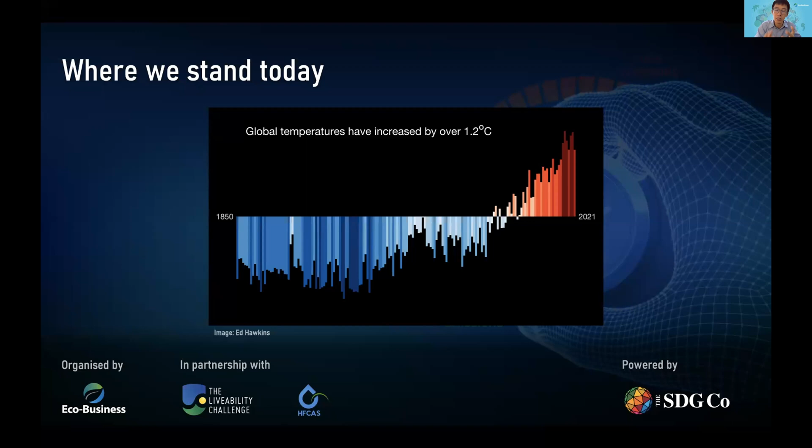I guess the tougher question now is how do we then take rapid steps to decarbonize, especially for a region like Southeast Asia? If you look at our energy consumption in the region, a good 75% is still fossil fuels. Renewables is the fastest growing energy segment, but the phase out of coal, gas, and oil will still take a few decades at least. So in the meantime, total energy demand is also rising rapidly as these countries develop in the region. It's estimated to go 60% higher in 2040.

Of course, renewables are taking center stage now in the fight against climate change, but there are also other technologies on the horizon which might be able to give the climate battle just that little boost. So that's why we're here with 2 of these technologies. One is, like I said, CCUS. In very simple terms, it's a way to capture carbon emissions and either store it underground or convert it into another useful material. The other is hydrogen fuel.

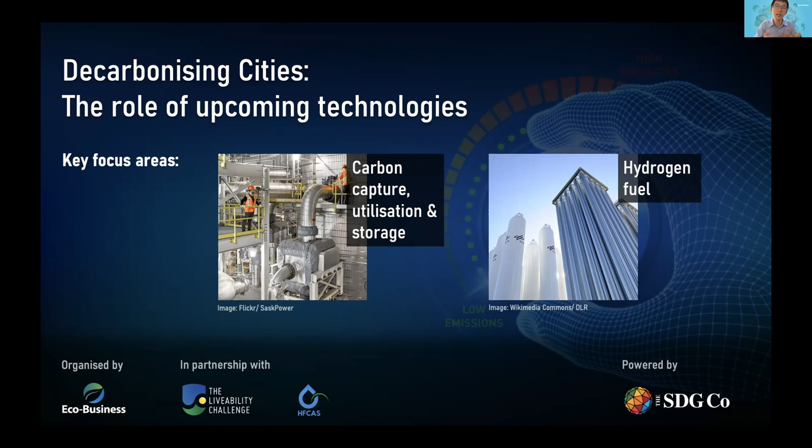It's not new per se, as it's been widely produced from fossil fuels for industrial users. Cleaner forms of hydrogen production are still nascent, but they're being developed today. And the world, of course, is tinkering with ways to replace fossil fuels with clean hydrogen. Of course, there are also challenges, and some of them concern their very role in a rapidly decarbonizing world because of their sometimes close links to the fossil fuel industry.

So now I'm delighted to introduce our speakers here with us today. We'll get the ball rolling with their presentations. We have Mark Allen, who is the founder of climate tech platform Unravel Carbon, which uses software and analytics to track and reduce businesses' carbon emissions. Mark is a chemical engineer by training and has 2 decades of experience in the energy sector, so he's familiar with both CCUS and hydrogen projects.

We also have with us today Noel Chin. He's the president of the Hydrogen and Fuel Cell Association of Singapore. Noel's worked on projects with hydrogen fuel cells in the past, and he has been very active in connecting the research and industry community together through the association he founded. Thank you for being with us here, Mark and Noel. I'd like to pass on the time now to Mark, who will present an overview of CCUS and low carbon hydrogen in the region. So anytime, Mark.

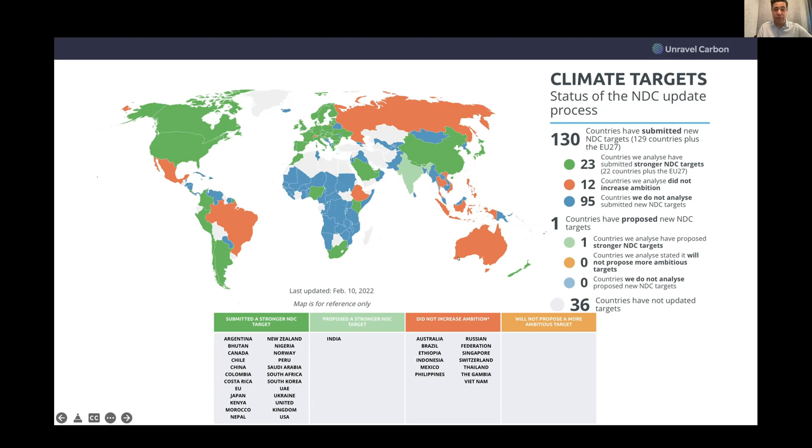You can see those in green, they've all committed to set a stronger target. The UN has stated that coming into Cairo COP27, all countries are to come with increased ambition. So all countries are going to be required to decarbonise at a faster rate going forward. Obviously, that's impacted everything we're doing here in Singapore.

You may have seen some of the speeches around the Singapore budget speech recently and what the country's doing, particularly with respect to the carbon tax, increasing it from $5 per tonne now up to a potential price of $50 to $80 per tonne in 2030.

Some of the things they're doing around that are to flag or potentially implement a future revision to targets, and achieve net zero by or around 2050, which is different from the 'as soon as practicable in the second half of the century.'

That hasn't yet been formalized in the low emissions development strategy nor the nationally determined contribution, but in the lead up to Cairo, I would expect a little bit of motion in this area as well.

Not to mention companies are going to need to understand their exposure, look at what decarbonisation means to them, and disclose to SGX for listcos coming up this year.

Add on top of that, net zero commitments that have been made by a number of countries, particularly in the region. So 90% of global GDP is already covered by a net zero target of some description.

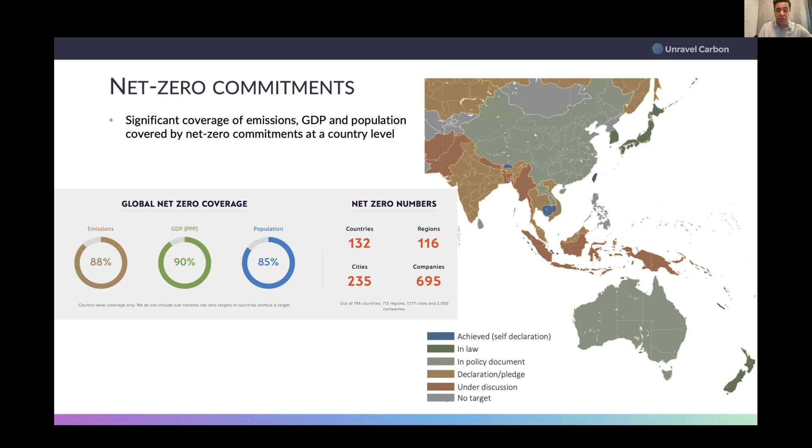But there's a lot of talk in this area and a lot of discussion around achieving net zero. Then really important: how do we do that?

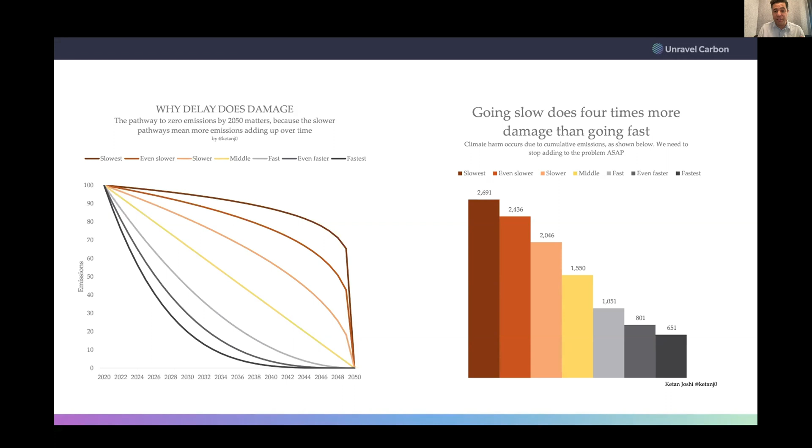This has an impact on cumulative emissions. Climate change is actually a cumulative emissions problem—it's not about the absolute emissions we put up each year, but how much emissions we put in over time. Taking the slow way, doing it all in the last minute, adds significantly more cumulative emissions than decarbonising today. So it's really an impetus to start decarbonising as fast as possible.

We're looking now at three key pillars in terms of decarbonisation. Firstly, the electricity system—number one, electrifying everything that can be cost effectively electrified. So we're talking about electrification of transportation, something Singapore is very big on, electrifying the built environment, getting rid of where we're currently using gas for residential or commercial uses, and of course electrifying low-grade heat, replacing gas or LPG with electrons.

Then we're also maximizing our efficiency—installing high efficiency motors, industrial chillers, maximizing efficiency of distribution, etc., and making sure that all of the electrons we generate get to where they need to be and are used in the most efficient manner. These are not sequential—everything gets brought up together.

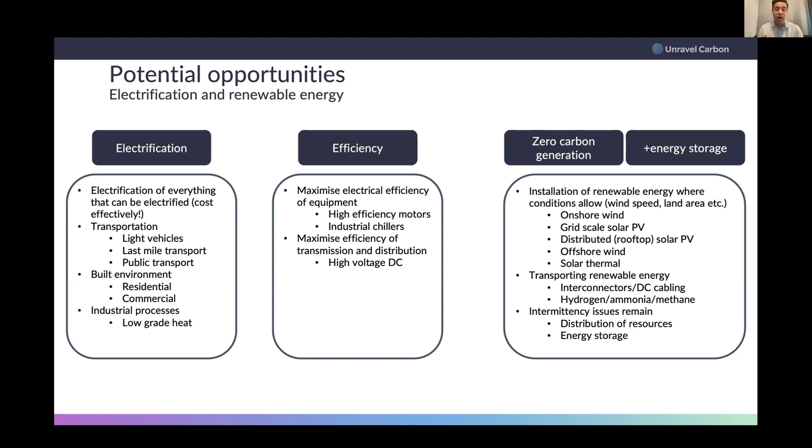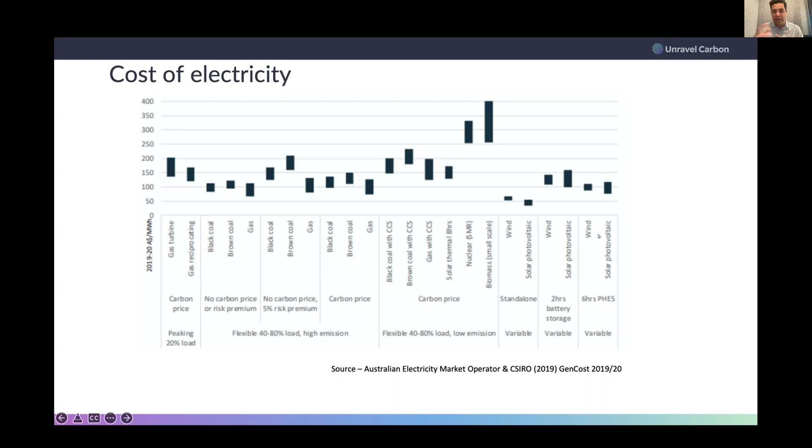At the same time, we're looking at how do we generate zero carbon energy. And because renewables are inherently intermittent, how do we solve the energy storage question, which is where there's a big role for hydrogen or ammonia or methane or one of the hydrogen carriers. On a cost basis, yes, wind and solar are the cheapest way to generate electricity on a levelized cost of energy basis today. When we start to include things like storage, it actually takes renewable energy onto par with some of the fossil fuel energies at the moment, even with a carbon price. So we need to solve this battery storage, this intermittency issue.

So when we start to look at that, then what are the ways in which the different technologies we have available to store energy? Hydrogen itself plays a big role in terms of something that can store a lot of energy and can discharge it over a long period. Synthetic methane also lives in there. Some of these physical methods - pumped hydro, cryogenic air, compressed air - they can all play that role as well. A lot of the focus is currently on lithium-ion batteries, but an issue is they discharge over a relatively short time, and the way you store a lot is just by having more and more batteries one after the other. So they're not as good for grid-level storage.

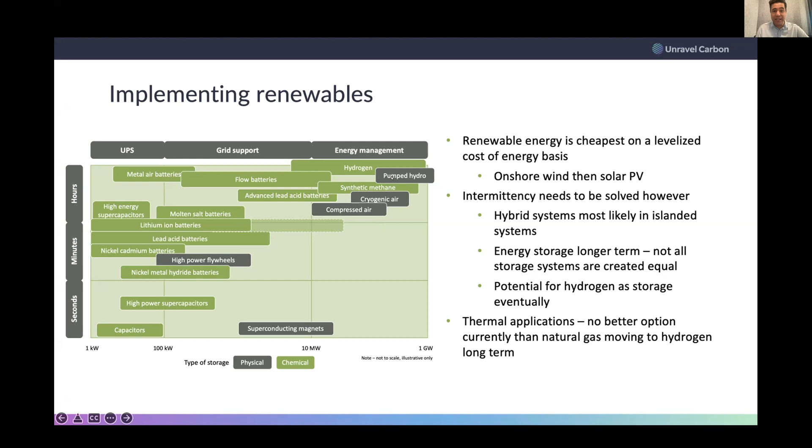And long-term storage - this is where we start to see, certainly in an energy management area, hydrogen playing a big role. So if we start to look at some of the potential opportunities around using hydrogen, what are the demand centers that we have for hydrogen? We've got a cool picture here of the Kawasaki ship, the Suiso Frontier, that just delivered its first load of liquid hydrogen to Japan from Australia.

So hydrogen itself forms an important part of the zero carbon future, but there are a number of technical challenges, particularly around storage and transport of hydrogen. And a lot of these issues are actually as a result of the physics of hydrogen - physical characteristics of the molecule that make it difficult to store and difficult to transport because it's very low density, it's very small, it tends to leak, and has to be stored at really high pressure or really low temperature.

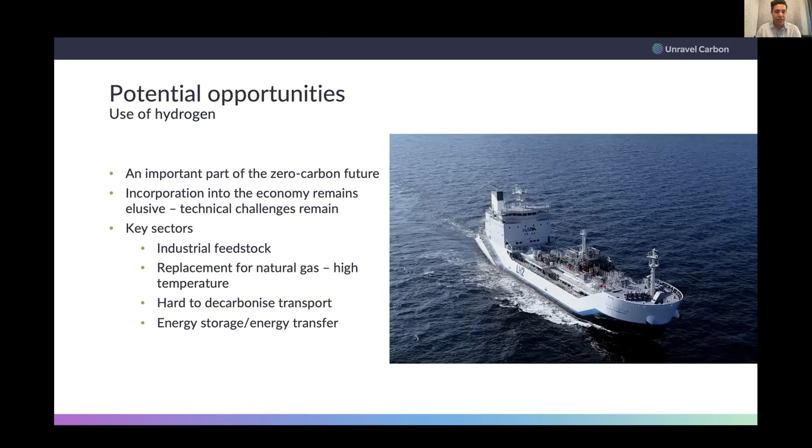Key sectors in which we're going to use it going forward and currently use it: industrial feedstock is a big place right now, and changing that to green hydrogen is almost a no-brainer. Replacement for natural gas for high temperature applications, using hydrogen to provide that heat that we might need in power generation or in boilers, etc. Hard to decarbonize transport - ships and planes and long-range off-road vehicles, etc. And of course, energy storage and energy transfer - taking renewable energy from where we have lots of renewable energy and sending that to places that don't necessarily have that same access to renewable energy.

Then looking at the different methods of hydrogen production, there's the current industry standard, the brown or grey, as it's called - when I was in the hydrogen industry it didn't have any colours, but now it does. So producing hydrogen from fossil fuels using a steam reforming plant, partial oxidation gasification - well-established process, very mature, generates quite a lot of CO2. Blue hydrogen is where we use a fossil fuel fired hydrogen plant, but we install carbon capture and storage on top of that - two operating in the world currently. And then finally, the holy grail, green hydrogen - producing hydrogen from electrolysis using green energy or clean energy.

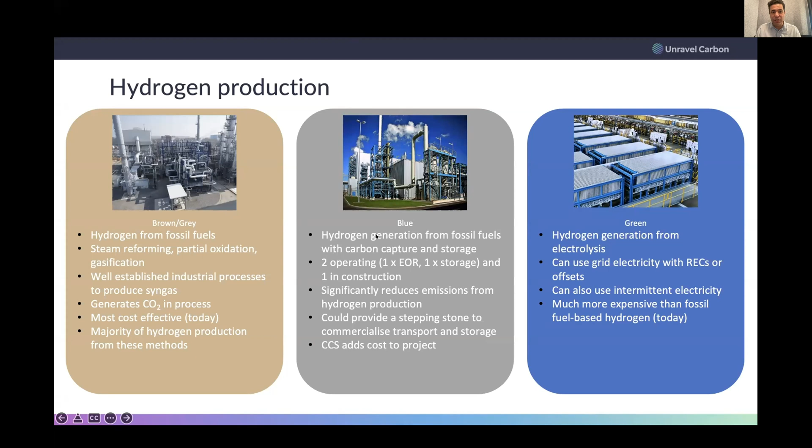And one of the advancements is electrolyzers can now actually handle some intermittency in the energy that they receive. To give you an idea of cost variation, we're talking about 80 cents a kilogram for brown or grey hydrogen, maybe $2 to $2.50 per kilogram for blue, and then $5 to $8 for green hydrogen.

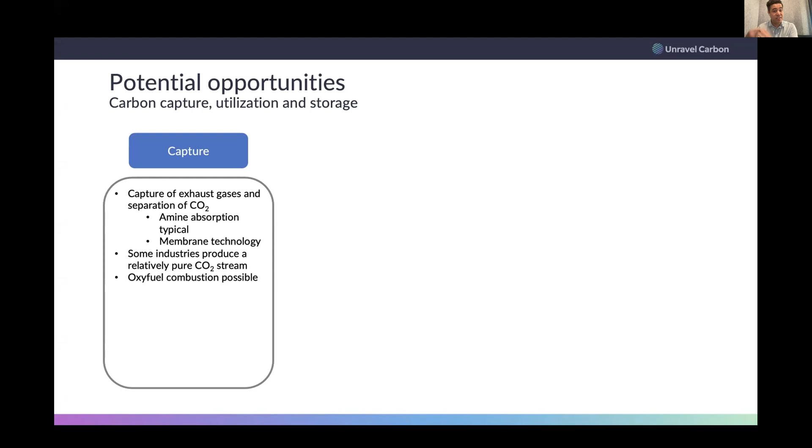We look at three key areas. So the capture part - taking a CO2 stream, or a stream that's got CO2 in it, running it through pieces of equipment like amine absorption or membranes, etc., and we can separate out the CO2 from that. Then we have the portion that is transport. So we capture CO2, we make pure CO2, we either liquefy it or compress it into what's called dense phase, then transport it to a storage location, and then we inject it underground - we actually inject it into the rock.

So understanding subsurface geology is key here, making sure that it can accept CO2. You're not going to break the rock apart when you inject the CO2 in there, making sure it doesn't move too far nor leak out. So that's the storage part.

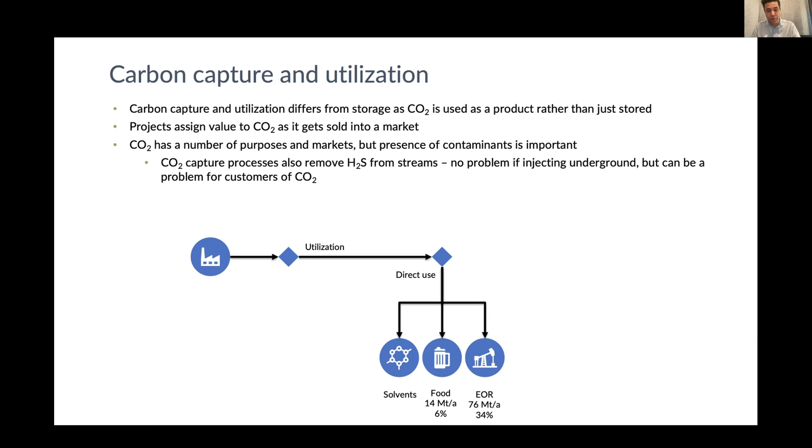somewhere around $70 to $150 a ton to justify that. If you can sell your CO2 for $70 to $150 a ton, then you've got a viable utilization project. So we've got some areas where we use direct use of CO2 in products, food, and oil recovery, solvents, and then some where we transform CO2 into something else — plastics, chemicals, fuels, etc.

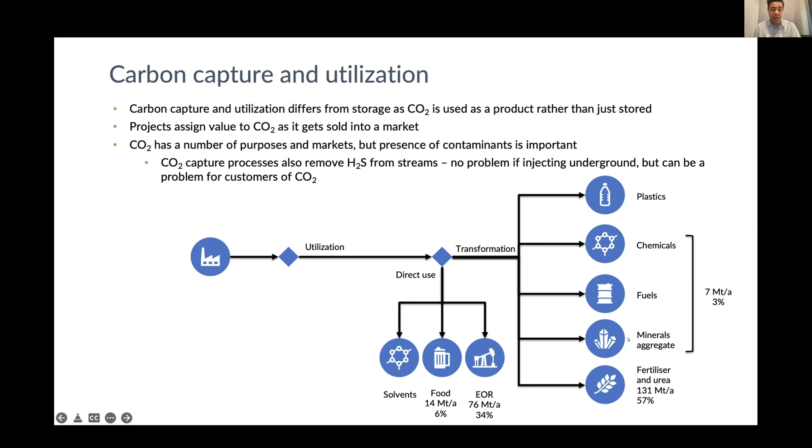So overall, the drivers are getting stronger, with much of the world's GDP now covered by net zero commitments, and hydrogen and CCUS certainly have a role to play there. Thank you very much, I'll pass back to Liang Lei.

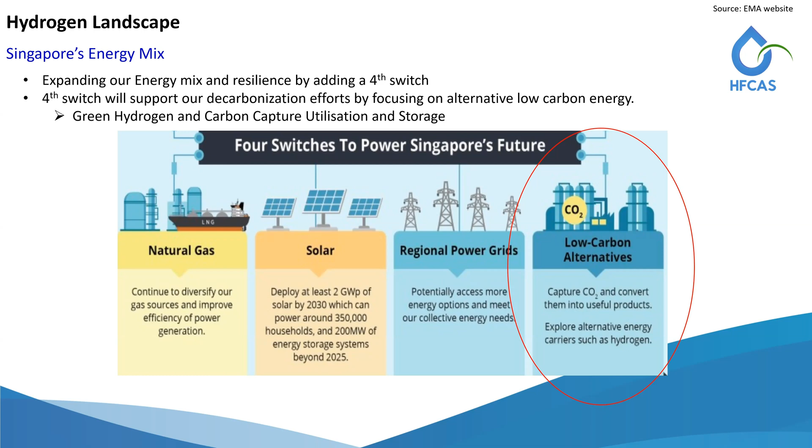Earlier this month, the Energy 2050 Committee announced a long-term strategy to decarbonize our energy sector by 2050, and hydrogen plays an important role in the medium to long term.

So what's green hydrogen and how is it produced? Traditionally, hydrogen was produced using the steam methane reforming process, where natural gas is used as fuel and CO2 is emitted. Whereas green hydrogen is produced through a process called electrolysis, where water is split into hydrogen and oxygen, powered by excess renewable energy. Unfortunately, Singapore, as a renewable-disadvantaged country, is unable to produce its own green hydrogen, except for the pilot trial at SPTI, which I will explain later on.

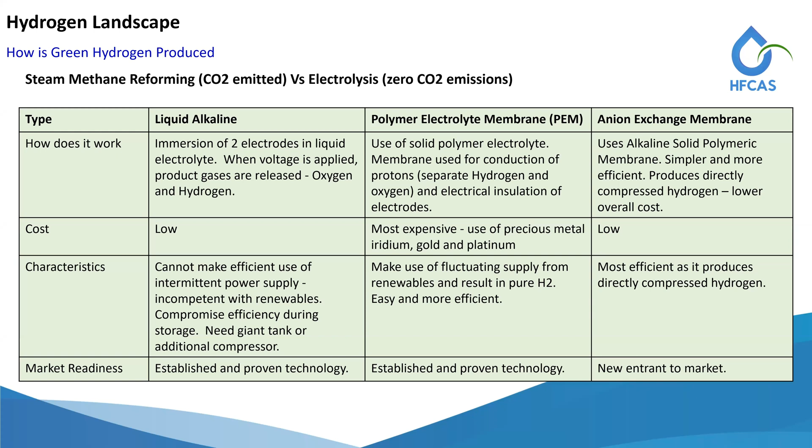There are three main types of electrolyzers, each with its own advantages and disadvantages. Of the three, the anion exchange membrane electrolyzer seems to be the most promising to date because it's able to lower production costs and is a lot easier to implement. We're pleased to share that our own local startup, SunGreen H2, is doing this and exploring overseas partnerships.

Here are the various energy carrier options that Singapore is exploring, such as green ammonia, liquid organic hydrogen carriers, and liquefied hydrogen. While each of them have their own merits, we have not closed our doors to any of them. It is thus important to carry out feasibility studies to explore each of these options.

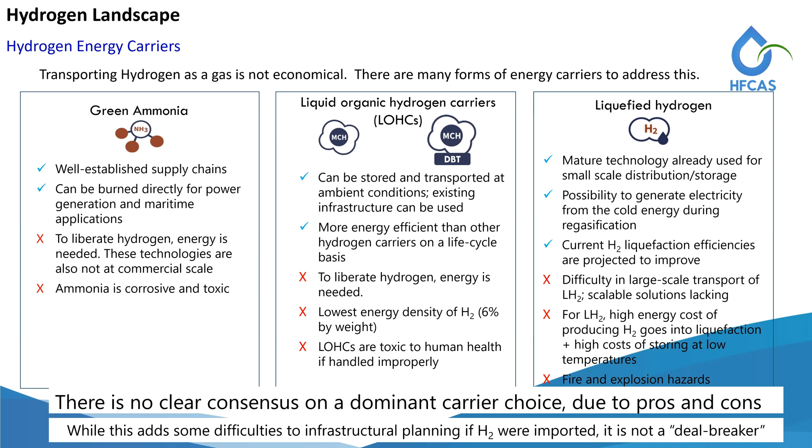This slide provides an overview of the hydrogen supply chain. Earlier, we looked at how green hydrogen is produced and the various forms of energy carrier. To be able to ship these carriers, vessels would need to be built to store and transport it, especially for liquefied hydrogen at minus 253 degrees Celsius. At the receiving end, ports will require specialized facilities to offload the carrier, store and process them before they can be distributed in the form of hydrogen to the different sectors.

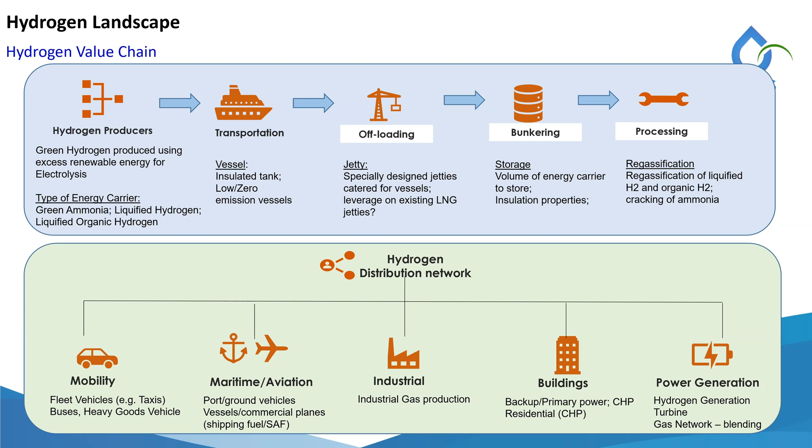What factors contribute to the eventual price of green hydrogen imports? As shared in the KBR report, one of the factors is the additional transformation and liberation costs, depending on the carrier. In the case of the Neoen project in Australia, this accounts for up to 60% of the landed cost of hydrogen. Other factors such as the cost of electrolyzers and the renewable energy from the source country are also important. But there is optimism that the cost of hydrogen would eventually fall due to more cost-effective transformation and liberation technologies, which is why there's a need for continual R&D, as well as the cost of electrolyzers and renewable energy falling in the long term.

Projections by the International Renewable Energy Agency, or IRENA, estimate that the cost of electrolyzers will be halved by 2040.

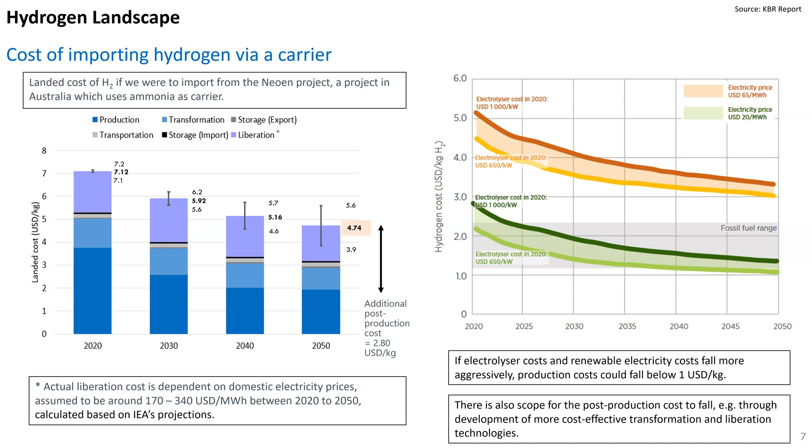Similarly, the report also highlighted other ways to secure low-carbon hydrogen. Other than shipping, you can consider piping hydrogen from nearby sources, or domestic production via SMR with CCS. We also look at electrolysis using electricity imports, biomass gasification, and methane pyrolysis.

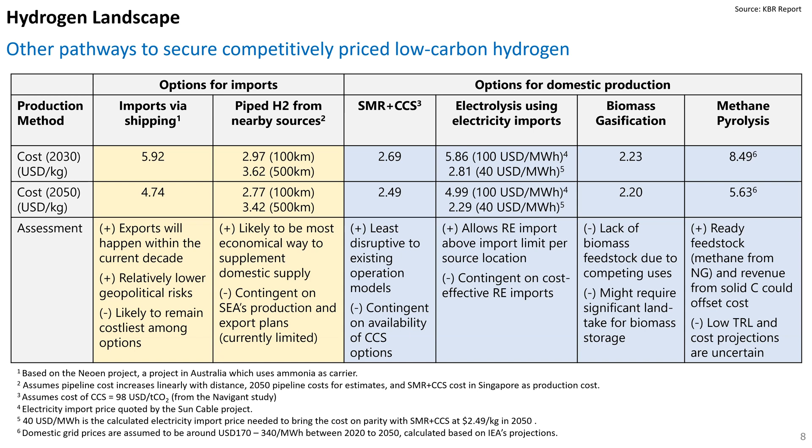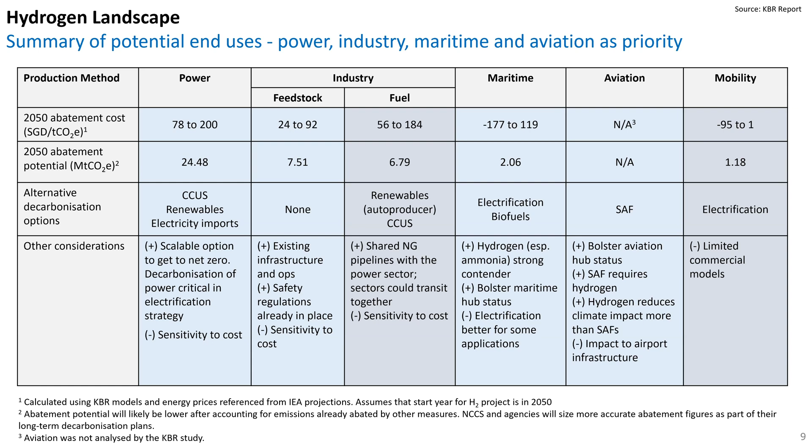Looking at how hydrogen can play an important role for the sectors identified that could transition to hydrogen, some can take place in the medium term, for example mobility, industrial, maritime, and aviation, while others will feature in the long-term plans, for example power plants. The next part of my presentation will dive into some of the applications for hydrogen in Singapore.

So what are the advantages of fuel cells? First of all, there are no moving parts, so no servicing is required. Secondly, it produces DC electricity, which can be used directly.

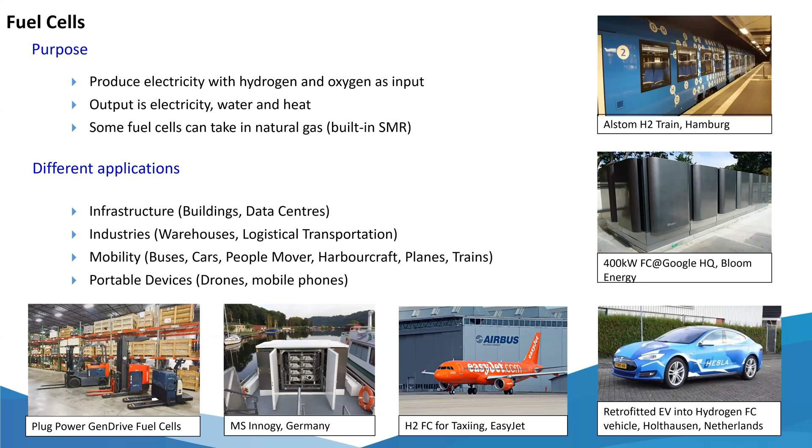Fuel cells are not new in Singapore. They have been used as backup power for two of our local hospitals, Tan Tock Seng Hospital and Khoo Teck Puat Hospital, which supports the Fire Command Center, as it has a faster startup time compared to diesel gensets. To overcome restrictions on storage of hydrogen, methanol is stored as a fuel and is converted into hydrogen on demand. Mobile fuel cell systems have been used in other countries or areas where there is no access to electricity.

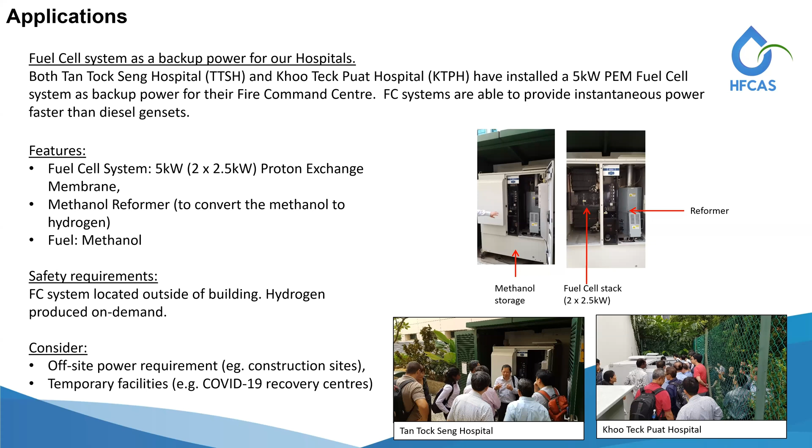There are some examples where fuel cells are used in buildings, from warehouses to residential homes to data centers. The benefit is derived where the fuel cell is used as a cogen system, producing electricity and heat. The heat is either used directly, as in the case of residential homes in Japan, or indirectly to power an absorption chiller to provide cooling. In Microsoft's case, while the capex for fuel cells is high, they saw the advantage of replacing diesel gensets, which sit there and do nothing according to them, with fuel cells that run as primary power. There's also growing interest in data centers in Singapore to explore the use of fuel cells to replace diesel gensets and support DC grid networks.

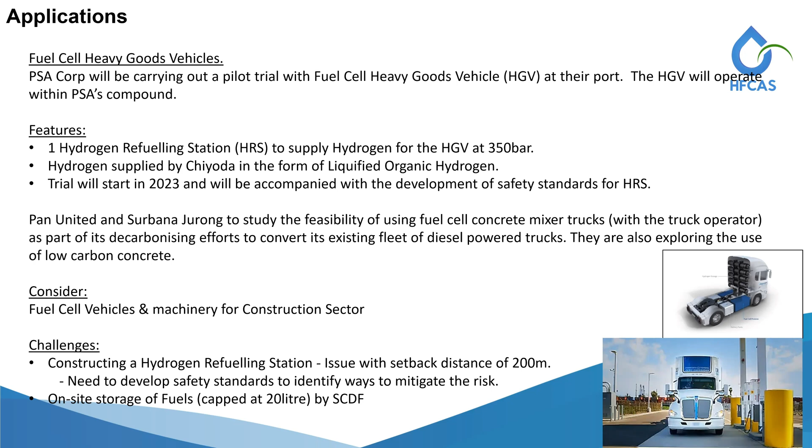There are other ways to produce low carbon hydrogen, such as a waste to energy gasification system, which is currently tested at Gardens by the Bay.

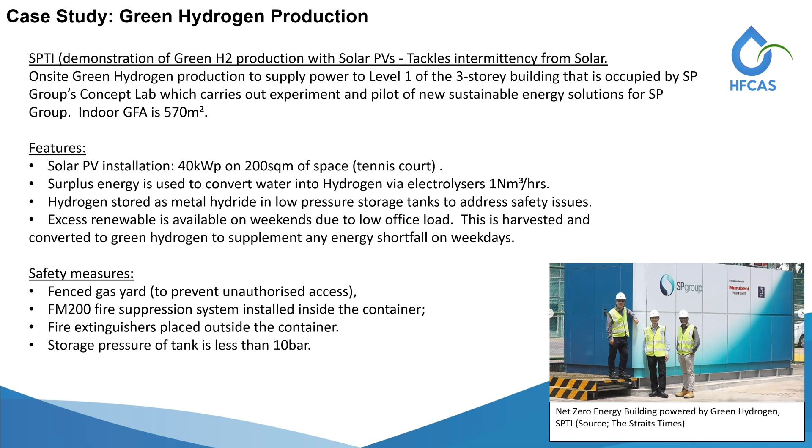The Energy Observer is a catamaran that was retrofitted to achieve net zero emissions as it sailed across the globe since 2017 and landed on Singapore shores in March 2022.

We were honored to be able to board the vessel and view some of the interesting technologies that were used, such as the widespread use of solar panels, storage of this renewable energy in lithium-ion batteries, and the excess energy will be used to produce hydrogen, especially during stopovers.

Toyota Mirai has also put in a fuel cell system, a 30 kilowatt fuel cell system, to produce electricity from the hydrogen that's being produced.

Some interesting facts: the wind turbines that were originally installed in the ship were replaced by wind sails that aided the vessel to sail more efficiently. And this was actually the first to be tried.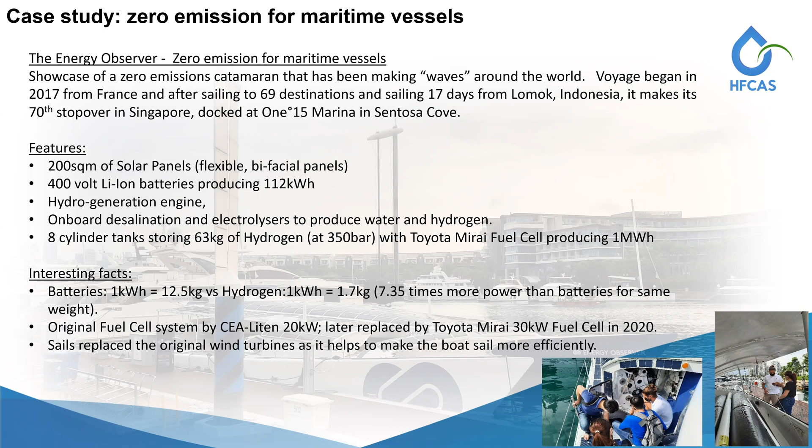So the question remains, can Singapore feature in the hydrogen value chain? As shared earlier, we have our Singapore SMEs who are specializing in various fuels and system integrations. And what would be useful is for Singapore to continue to focus on R&D led by our IHLs and research institutions. It's encouraging to note that the Singapore government has provided funding support from the low carbon energy research funding initiatives for hydrogen and CCUS projects.

And in order for hydrogen trials to take place, there's also a need to focus on development of standards. Currently, there are no standards for specific use of hydrogen and construction of hydrogen refilling stations in Singapore. So there's a need to actually develop such standards in order for the industry to be able to apply and deploy such projects. Secondly, training.

How do we professionalize our industry and upskill them? HFCAS is actually in the midst of developing courses, both fundamental courses as well as master classes, so as to upskill our workforce to be ready once hydrogen comes to the shores.

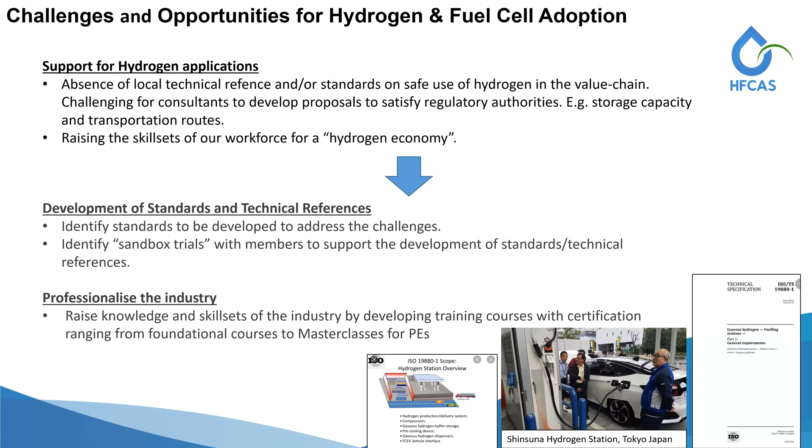Last but not least, how can we all come under one coordinated community of practitioners, such as industry leaders and government, to support the push for hydrogen in our country's efforts to decarbonize our energy sector and contribute to lowering the carbon emissions? This unenviable task is taken up by the Hydrogen and Fuel Cell Association of Singapore, to support the push for hydrogen and fuel cell development and deployment by promoting, encouraging, and assisting in hydrogen and fuel cell related activities. Thank you.

And yeah, thank you, Noel. That was a great dive into all the promises of hydrogen and fuel cell technology for both Singapore, and you gave some overseas examples too.